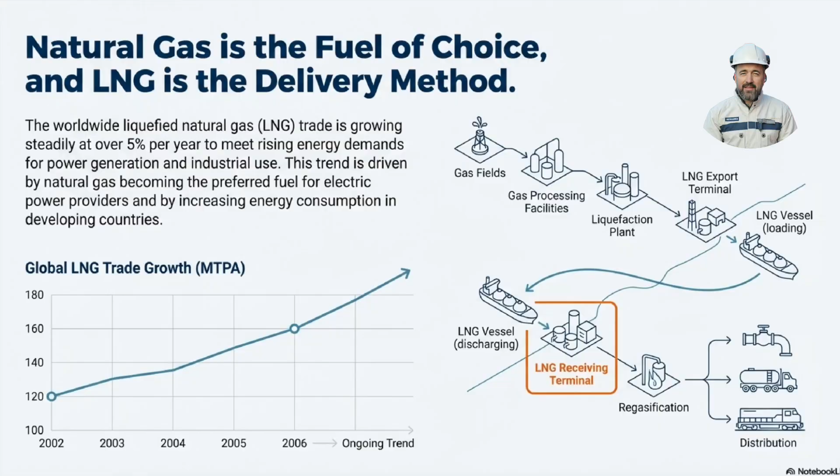Global LNG trade has been steadily rising, driven by growing power demand and the appeal of natural gas as a cleaner, flexible fuel. The slide's chart shows an upward trend in trade volumes, while the diagram maps the chain from gas fields through liquefaction, vessel shipment, and finally to the receiving terminal, where regasification and distribution occur.

At the heart of every terminal is a simple mission: receive LNG from ships, store it safely at cryogenic temperatures, and turn it back into gas for the pipeline.

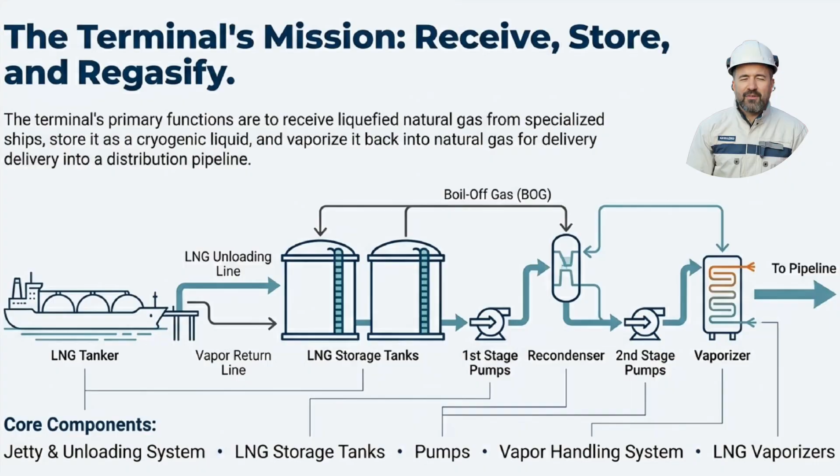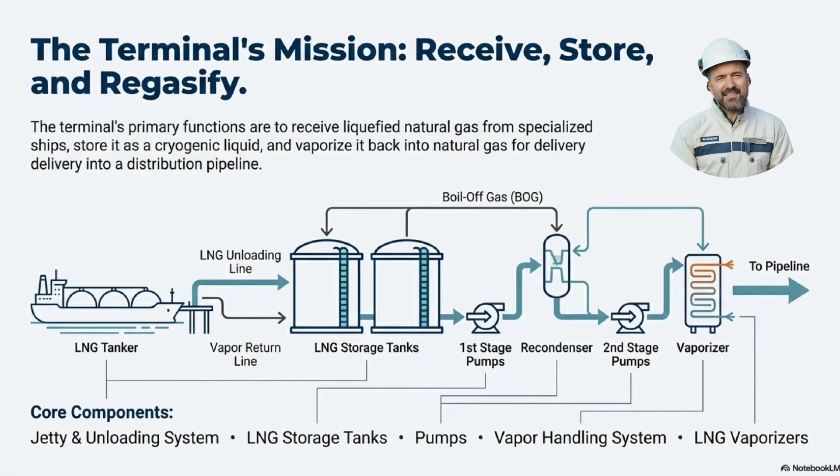The process flow diagram illustrates unloading, storage tanks, pumps, vapor handling, and vaporizers, while the listed components emphasize jetties, tanks, pumps, and vapor systems that make continuous delivery possible.

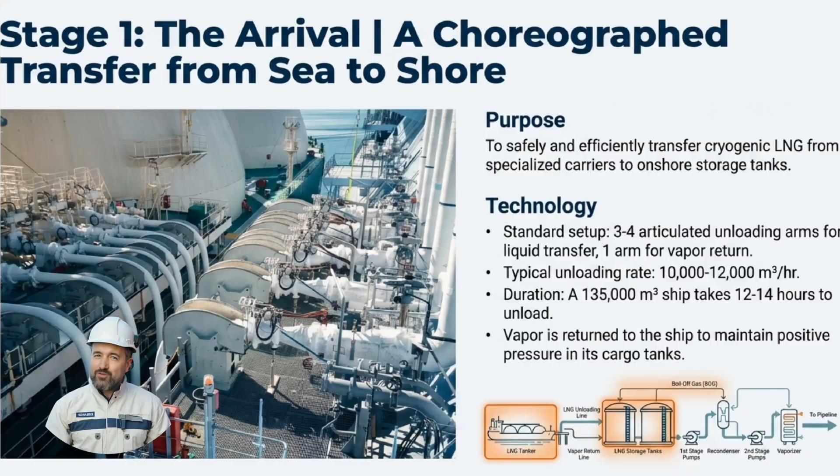Arrival is a carefully choreographed transfer from sea to shore, using articulated unloading arms to move cryogenic liquid into onshore tanks, while a vapor return line maintains cargo pressure.

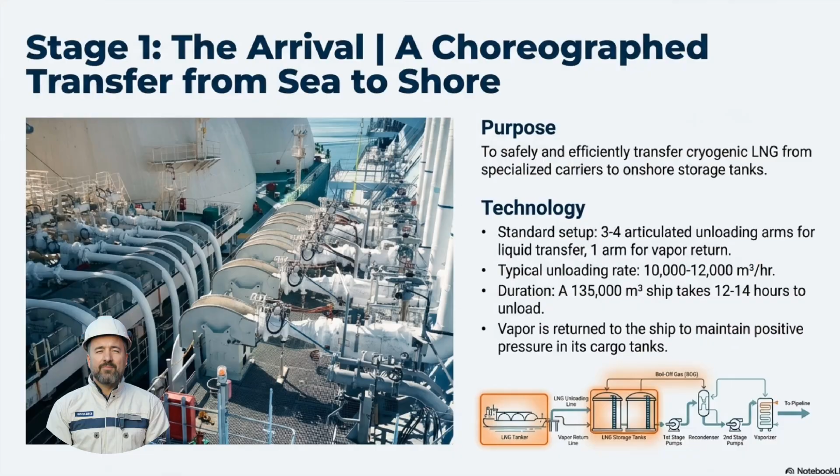Typical unloads take roughly 12 to 14 hours for large ships, with standard rates and safety steps designed to protect crews, vessels, and nearby communities during the transfer.

Unloading has seen innovation to reduce coastal impact and costs, driven by local opposition to large onshore jetties.

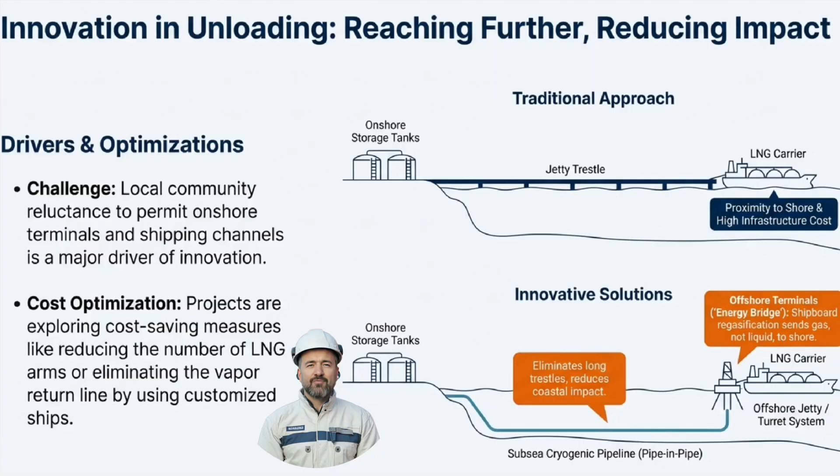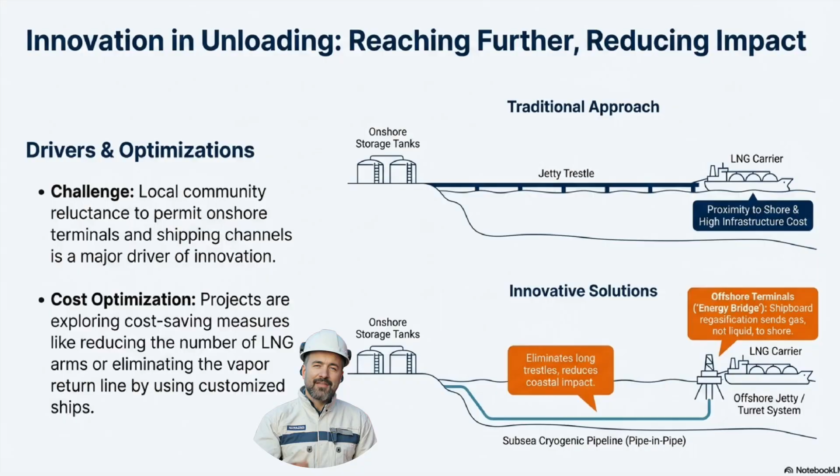New approaches range from longer reach systems to offshore turrets and subsea cryogenic pipelines that keep heavy infrastructure offshore, cutting shoreline disturbance and enabling flexibility in where terminals can be sited.

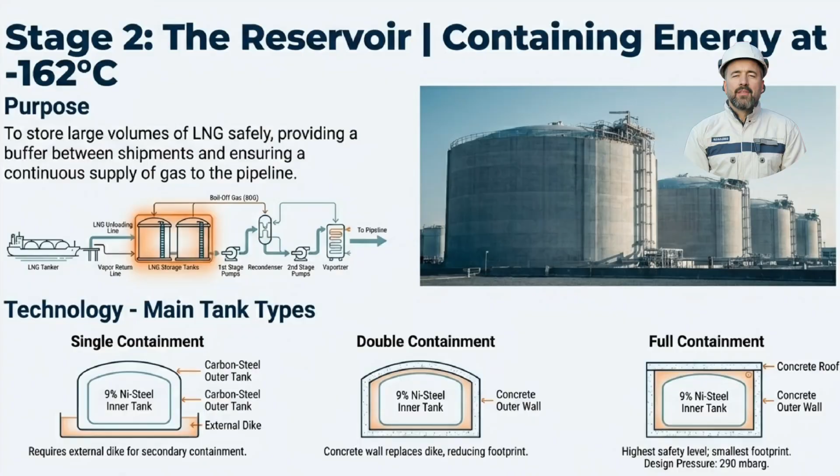Storage holds the energy at roughly minus 162 degrees Celsius and buffers shipments to maintain steady pipeline supply. Tanks come in single, double, and full containment designs, each trading off footprint and safety.

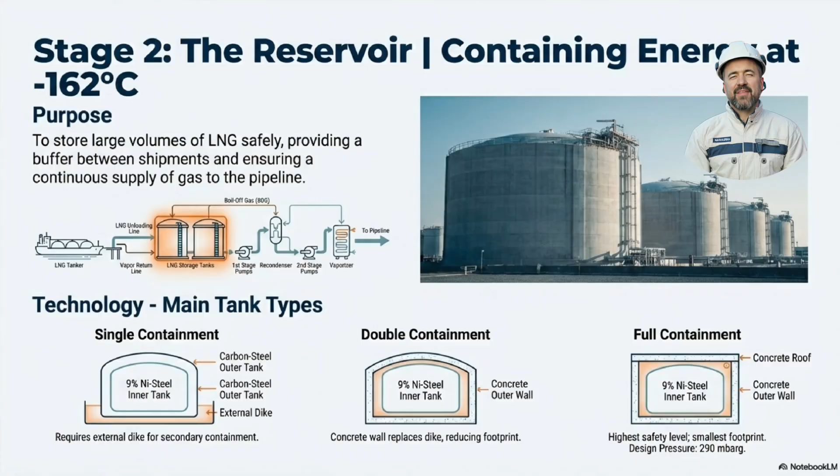The images show large cryogenic tanks and cross sections that explain how secondary containment and concrete walls are used to meet different site needs. Storage innovation trends toward larger, smarter tanks to lower unit costs and improve safety.

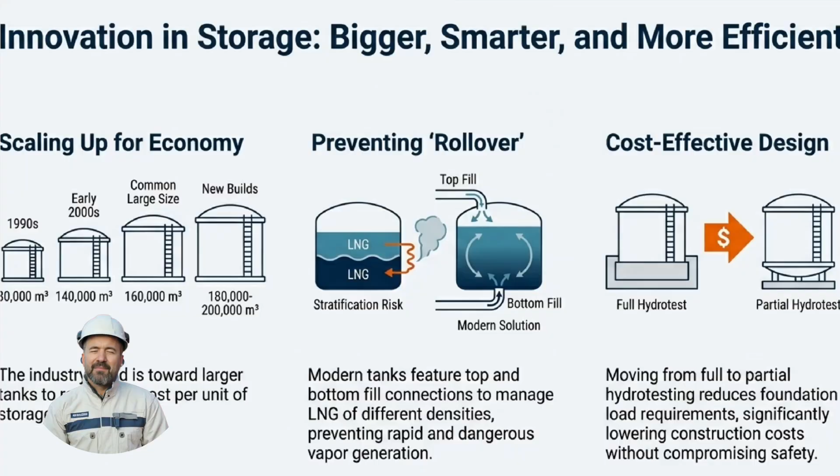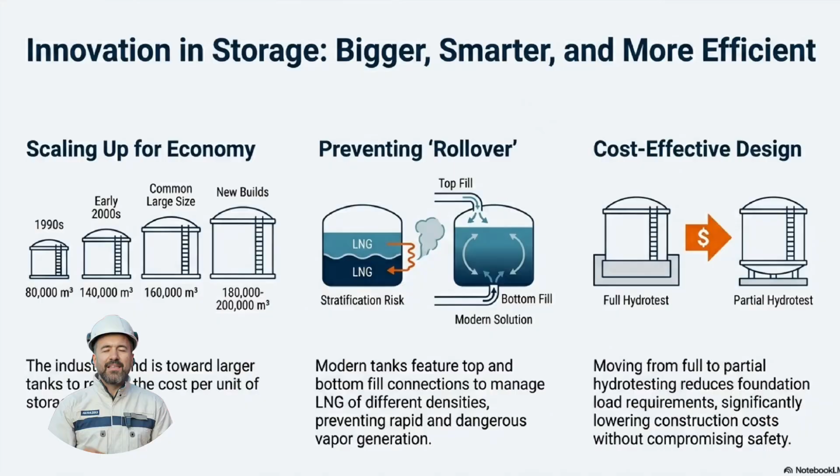Modern designs use top and bottom fill points to avoid dangerous stratification or rollover, and partial hydro testing has emerged as a cost-saving foundation strategy that keeps safety high while reducing construction load and expense.

Stage 3 is the engine room, where pressure and flow are managed. Submerged first stage pumps raise pressure, and subcool LNG recondensers capture boil off gas, and high pressure multi stage pumps push product toward the vaporizers.

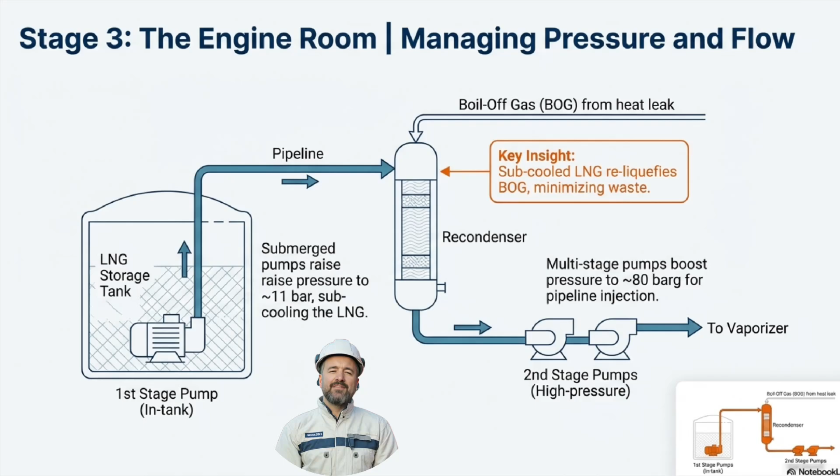These pumps push product toward the vaporizers at pipeline injection pressures. This combination minimizes waste and stabilizes delivery pressure for the downstream system.

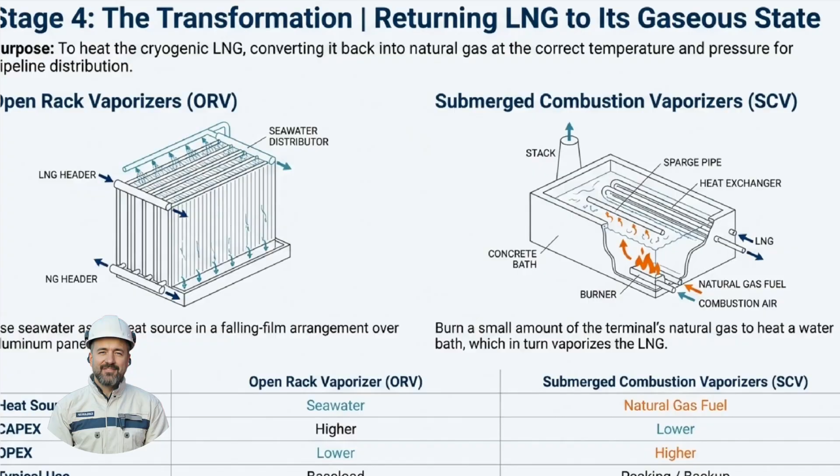Transforming LNG back to gas uses different vaporizer technologies depending on resources and needs. Open rack vaporizers use seawater in a falling film arrangement for baseload supply, while submerged combustion units burn a bit of gas to heat a water bath for peaking or backup.

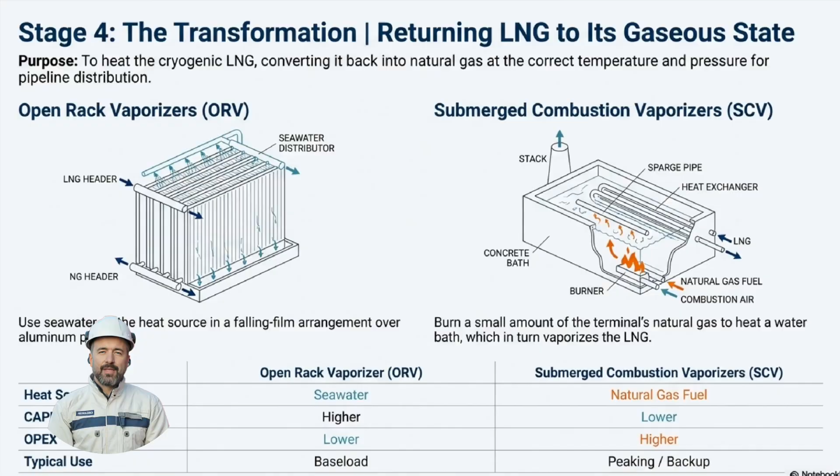Each choice balances CapEx, OpEx, and typical use cases. Traditional vaporization wastes a lot of the LNG's cold, but that cold can be harnessed.

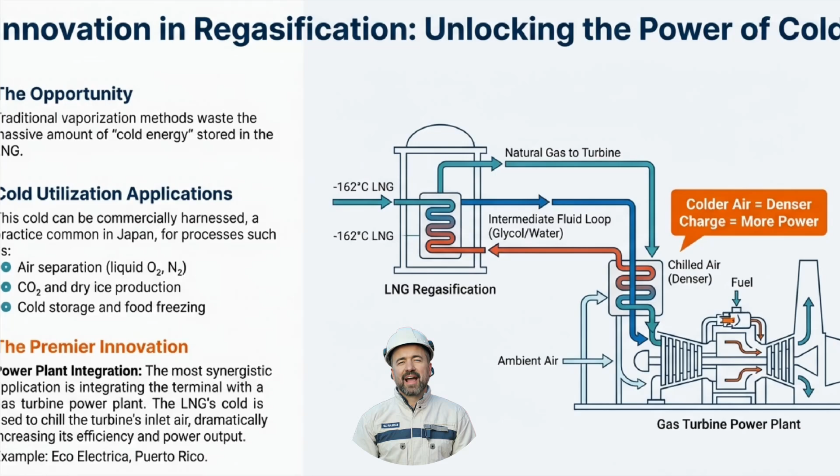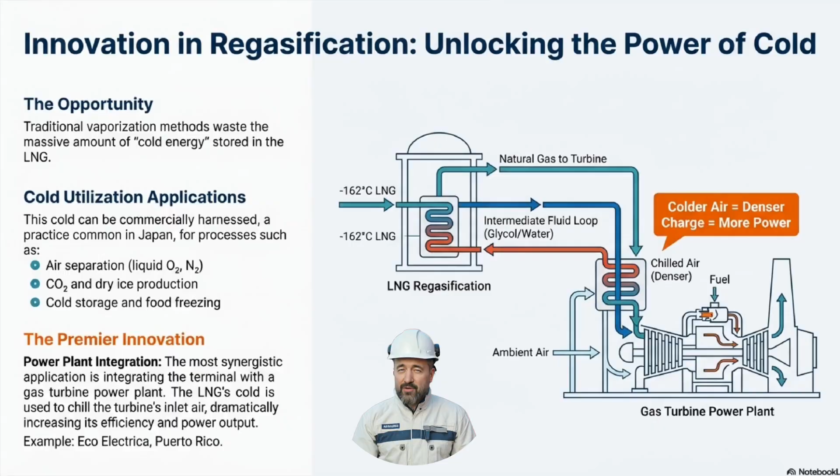The slide highlights cold utilization opportunities like air separation, CO2, and dry ice production, and, most powerfully, integrating the terminal with gas turbine plants to chill inlet air and boost power plant efficiency and output.

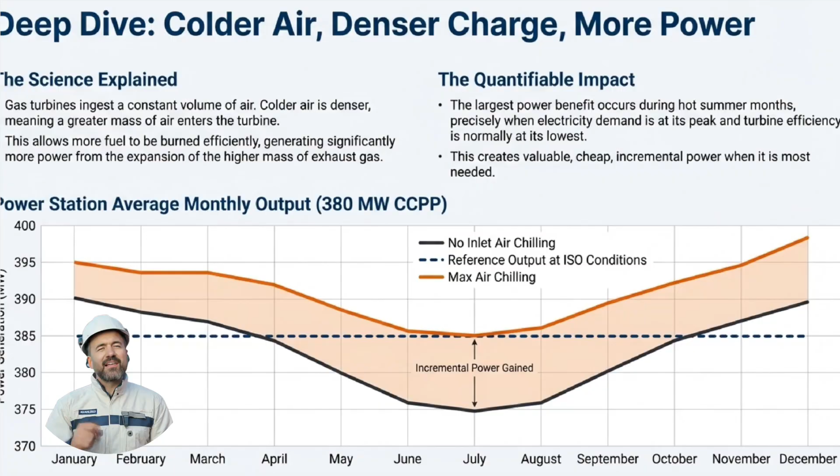Colder inlet air means denser charge and more power from the same turbine, a science that translates to measurable gains during hot months when demand peaks and turbine efficiency drops.

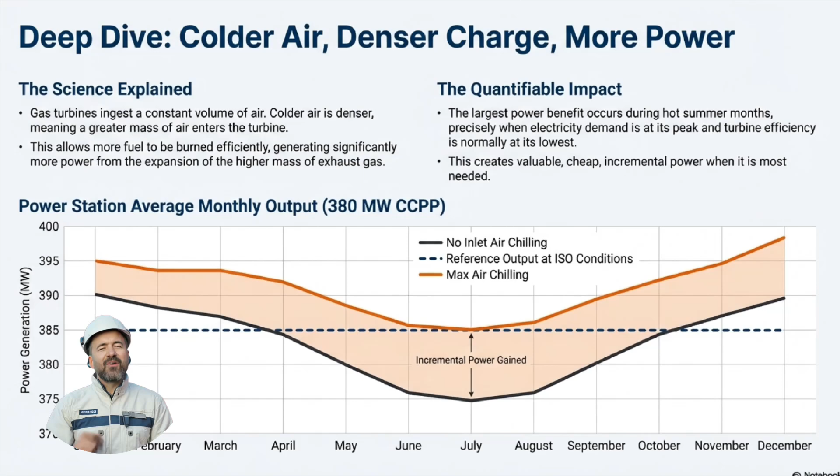The chart illustrates incremental power gains from inlet chilling, showing tangible value where grid stress and peak prices are highest.

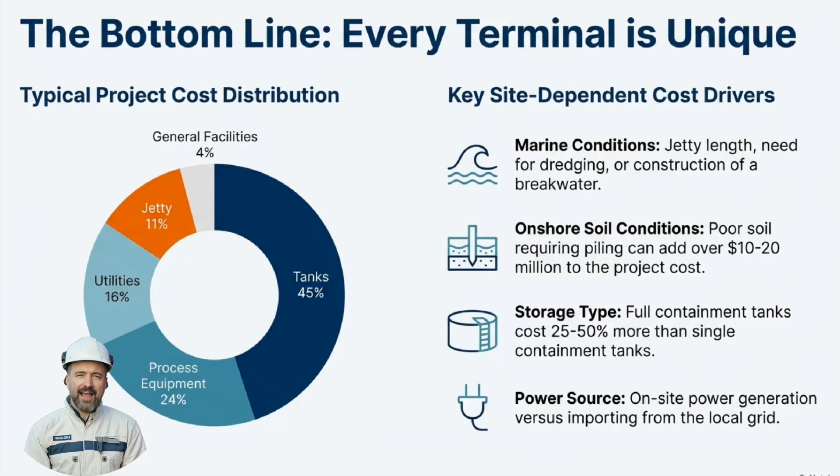Tanks and process equipment take a large share, but marine conditions, onshore soils, storage containment type, and whether power is generated on site or imported can each add millions. So careful siting and design choices are essential.

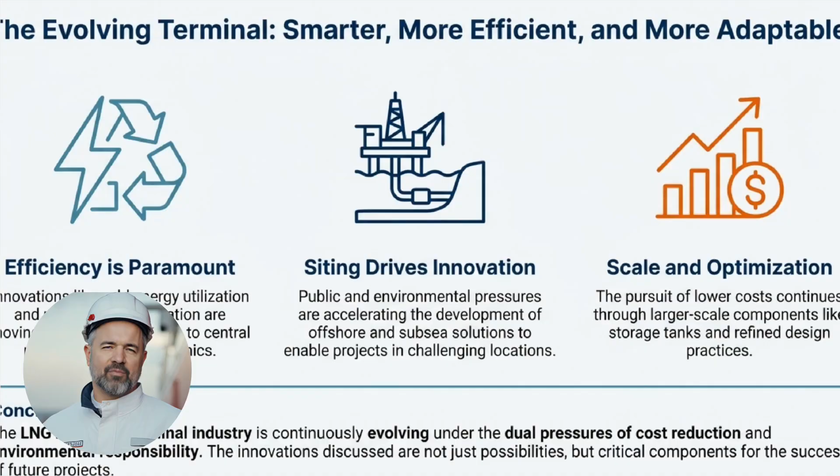Looking ahead, terminals are becoming smarter, more efficient, and more adaptable. Cold energy utilization and plant integration drive efficiency, siting pressures accelerate offshore and subsea solutions, and scale plus refined design practices push down unit costs.

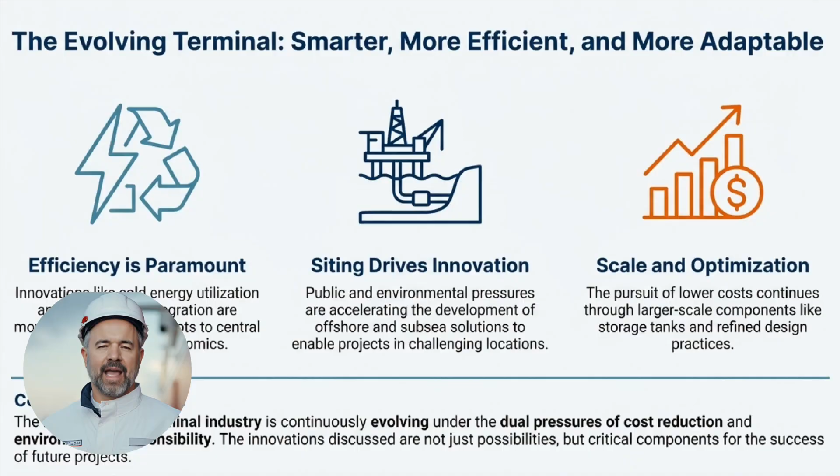These practices push down unit costs. The industry is evolving under dual pressures of cost reduction and environmental responsibility, shaping future projects.